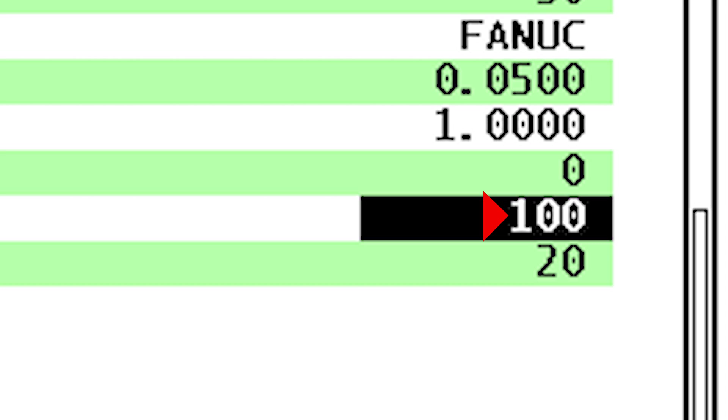Let's start up our spindle at 2000 RPM, and let's turn on SSV. Our settings have SSV adding and subtracting 100 RPM from our speed continuously every 2 seconds. And we can hear the spindle speeding up and slowing down.

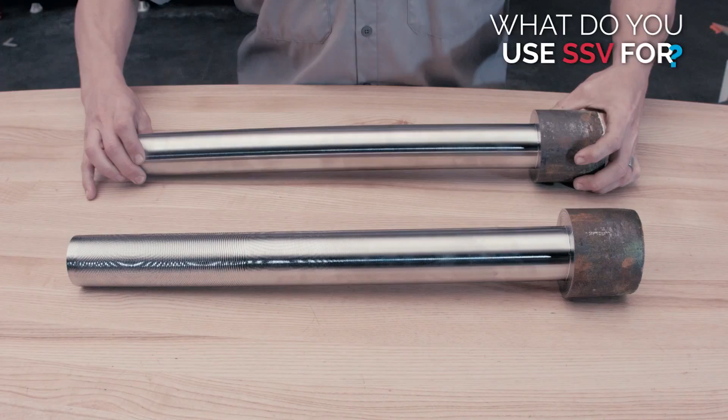Now we'll turn out the lights and turn on a strobe light flashing 2000 times a minute. Now we can see our chuck rotating faster and slower than our 2000 RPM commanded speed. That's cool, but what do you use SSV for? Well, when difficult cutting conditions cause chatter in your workpiece, SSV can help.

We all know chatter is bad, but what is chatter? Describing how chatter starts and progresses during turning can get really complex. In essence, chatter amounts to a resonance that starts between the part and the cutting tool, leading to a vibration. This vibration causes a rough, uneven cut on the part.

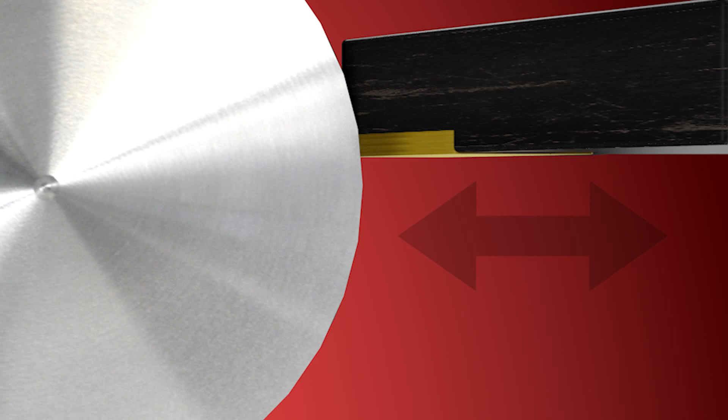This uneven surface causes the vibration to intensify, making the surface rougher still, causing the vibration to increase again and on, until the part is screaming and the finish is terrible. Now the workpiece and the tool are vibrating badly, causing the cut to unload and load back up many times a second, spiking cutting force like an interrupted cut. No wonder it's shrieking.

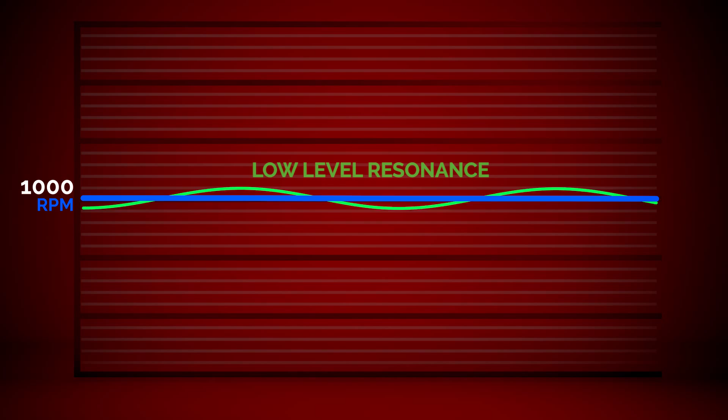If it's resonance that gets all of this started, what if we could stop this resonance from even beginning? That's exactly what SSV is designed to do. Let's look at an illustration of how SSV impacts chatter. Here we have a nice, steady, low-level resonance as our cut is progressing normally.

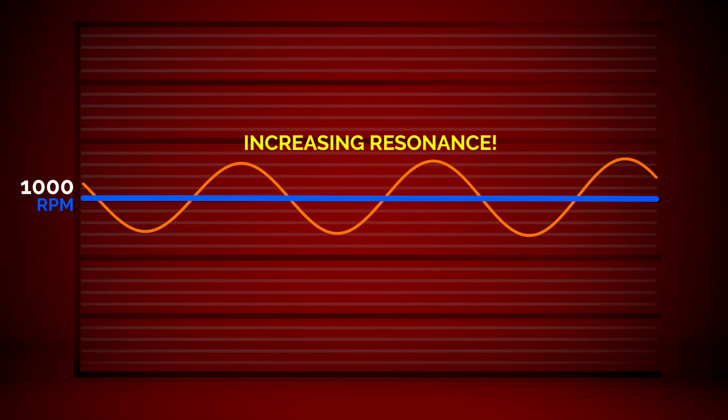When we encounter poor cutting conditions, the resonance begins to change, and we get that escalating vibration that we just described. This vibration will just keep on increasing and increasing. Now we'll turn on SSV. The spindle speed is now going up and down, and that spindle is spending very little time at that resonance speed, keeping it out of the chatter zone. So, the vibration resulting from the resonance has no chance to progress into chatter.

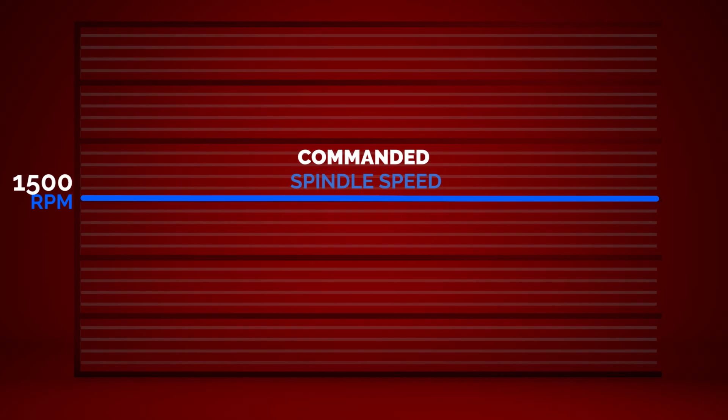So, how do I use this feature? We use setting 165 and setting 166 to drive SSV. In order to understand these settings, let's take a look at this graph. The middle line represents our commanded spindle speed. SSV setting 165 controls spindle speed variation. We're going to insert a value of 150 here.

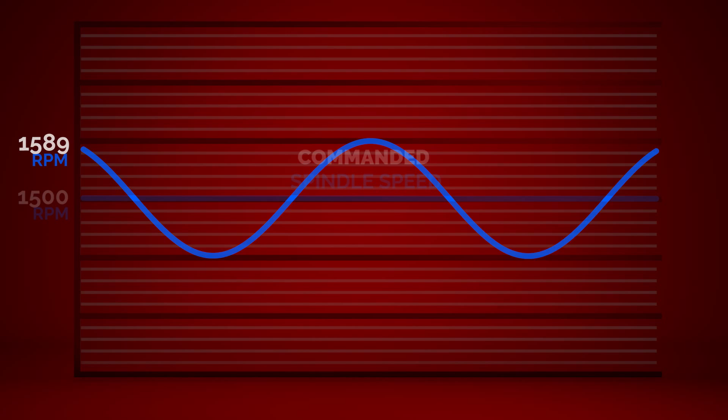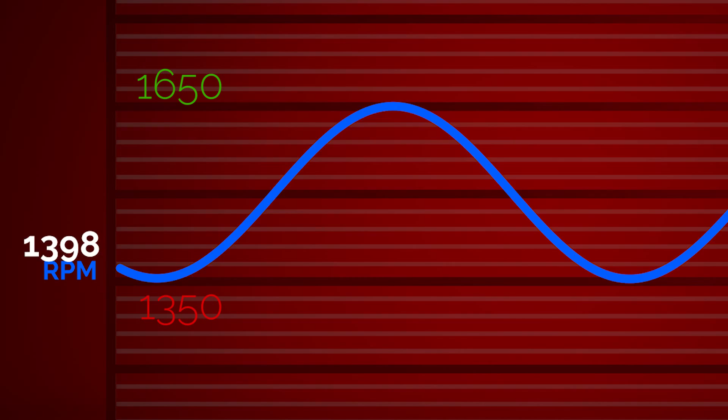What this does is, it causes the spindle speed to increase by 150 RPM and then decrease by 150 RPM. On our graph, that spindle speed swing is represented by this blue line. So our value of 150 yields a high RPM of 1650 and a low RPM of 1350. As you can see, the total RPM range is 300 RPM.

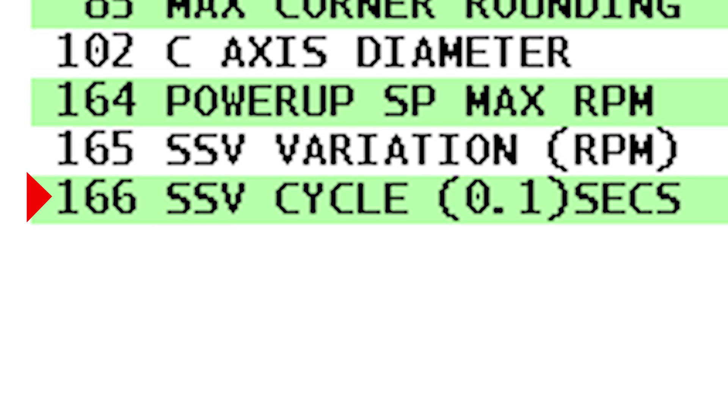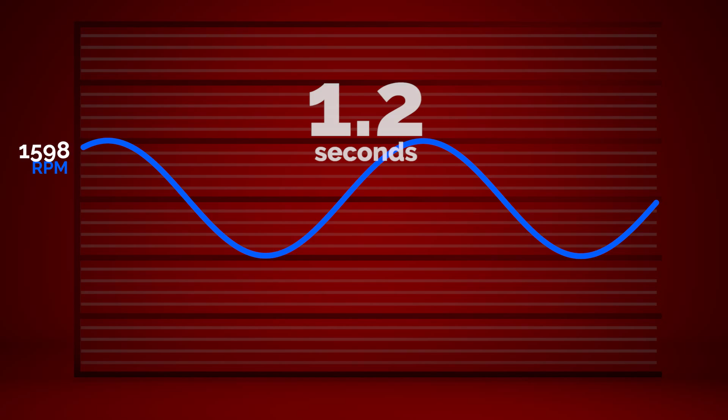SSV setting 166 controls the time period, and on our graph, the distance across the curves represents the time for one cycle. In our example, we'll use a value of 12, where each unit equals 0.1 seconds. The value of 12 gives a time period of 1.2 seconds to complete each of those 300 RPM sweeps.

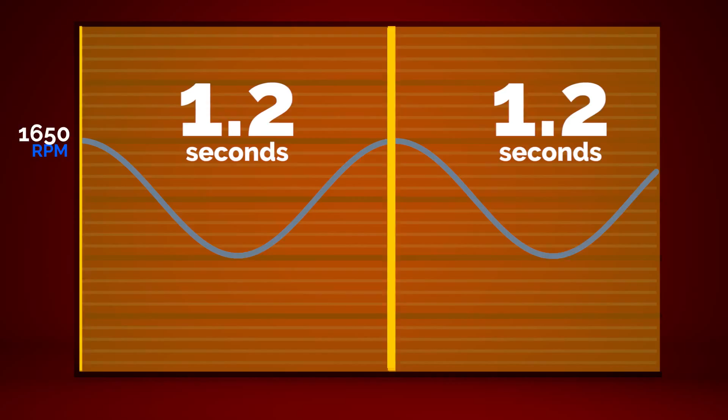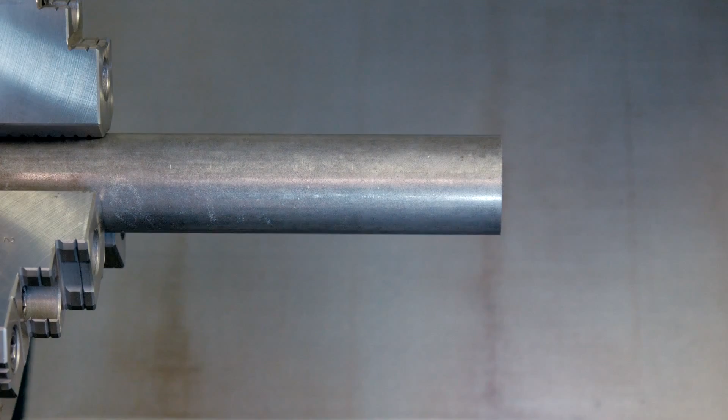Now that we understand the SSV concept a little, let's look at what SSV can do when we're cutting without tailstock support. We're going to turn this 1.75-inch diameter shaft and see where the chatter starts. The shaft is held 7 inches out at an unsupported length to diameter ratio of 4:1. Once we reach a diameter of 1.25 inches, this is where we begin to see chatter.

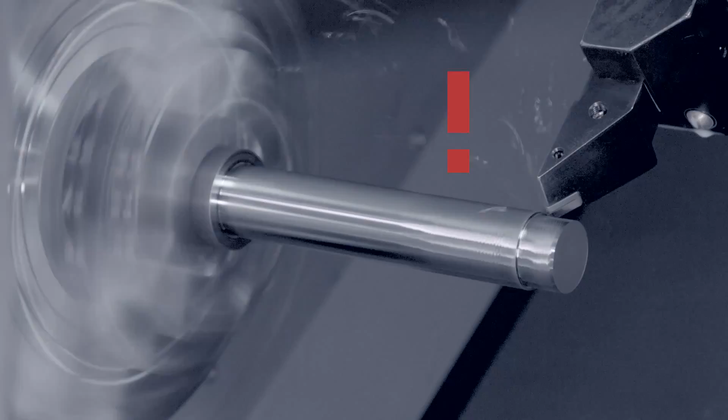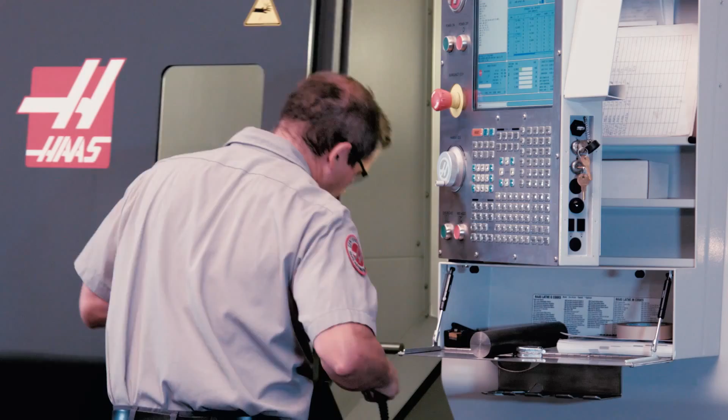On the next pass, at a diameter of 1.15 inches, we're at a 6:1 L/D ratio, which is well past where we normally would need tailstock support. And indeed, we have some serious chatter. Typically, as the L/D increases, chatter also increases. So let's cut a fresh one of these at that same diameter with SSV on. Let's see if it fixes the problem.

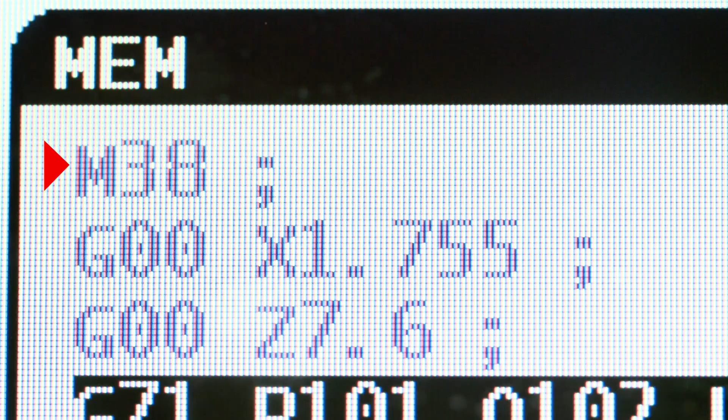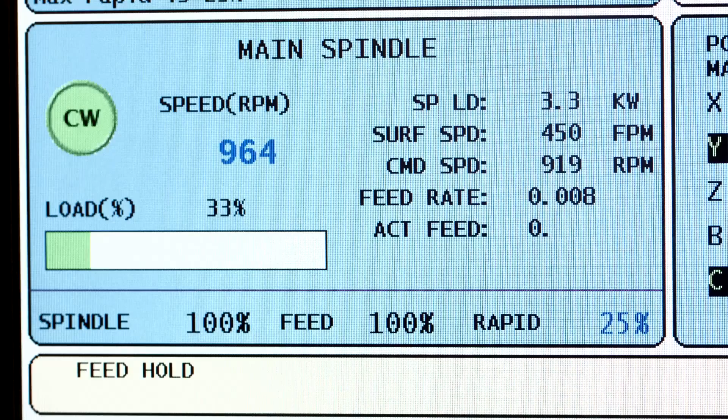We insert the M38 command in our program to turn on SSV. We'll use the SSV values from the earlier example. We had setting 165 set at 150, and we had setting 166 set at 12. Remember, that gives us a 300 RPM swing every 1.2 seconds. We can see that the bar cut using SSV has a much better finish.

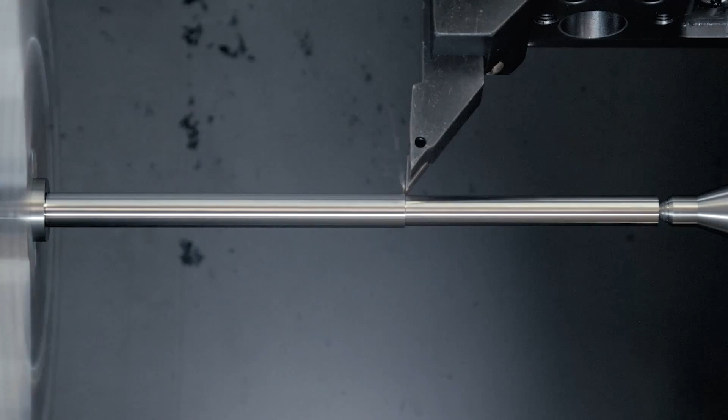If we had to cut this part without a tailstock, which we know we shouldn't, SSV saves our part. Let's move on to demonstrate how SSV can extend your capabilities when cutting with tailstock support. We tried really hard to find a combination of material and an insert that would chatter during a tailstock supported cut. And what we found is the ST30 cuts so well under normal conditions it really didn't want to chatter.

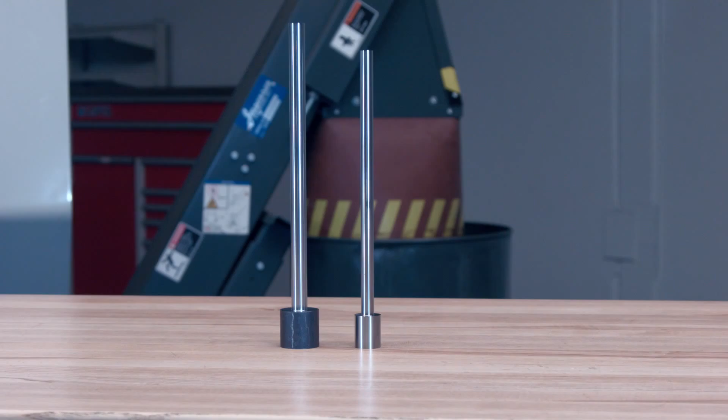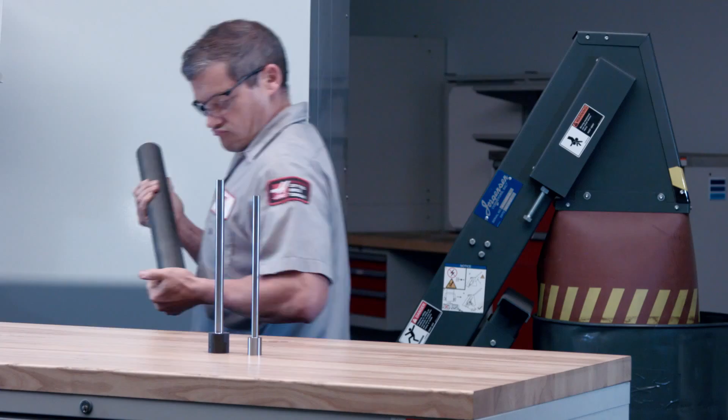After several attempts using smaller workpieces, we ended up down at a 1/2 inch diameter on a 10-inch long workpiece with no chatter and a decent finish. Now that's a 20:1 length to diameter ratio, and in 1040 steel, not the freest cutting material out there. We moved to much larger material, and we made the setup less and less optimal, until we found a combination of tooling and material that finally would chatter.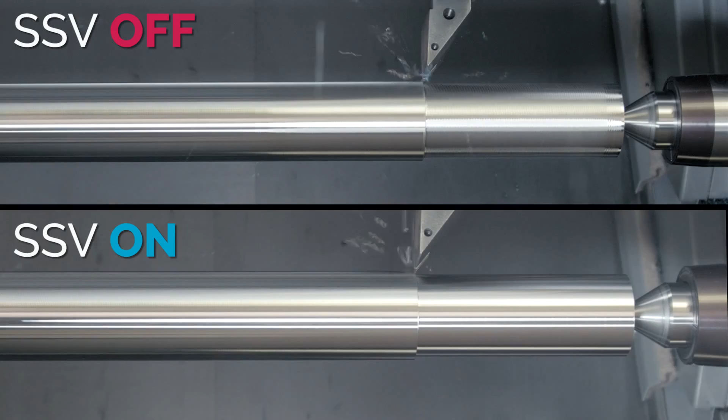And we're not saying you should expect SSV to cure chatter at this absurd level. Yeah, there is still chatter on the SSV part. But looking and listening to the difference between the two shows us that SSV made a really positive change. And if you aren't starting out with horrendous chatter, then SSV can often solve your problem. Okay, let's leave the realm of the ridiculous for a more common set of circumstances.

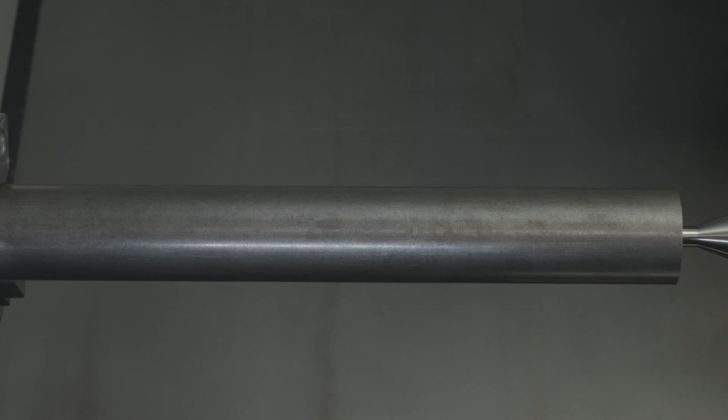This time we're using a 2.25-inch diameter, mild steel shaft, held 16 inches out from the jaws, still with tailstock support, of course. Our tool geometry is less than optimal, with a larger nose radius. Our slow feed rate is spending a lot of time in the cut, and the support is coming from a less rigid live center, all part of our recipe for achieving chatter.

With SSV off, we begin to get chatter at a diameter of 1.12 inches. Just to make sure we've got some decent chatter going, we'll take several more cuts until we're down around an inch diameter. Our test bar is now chattering quite seriously. The L/D ratio of this setup is now 16:1.

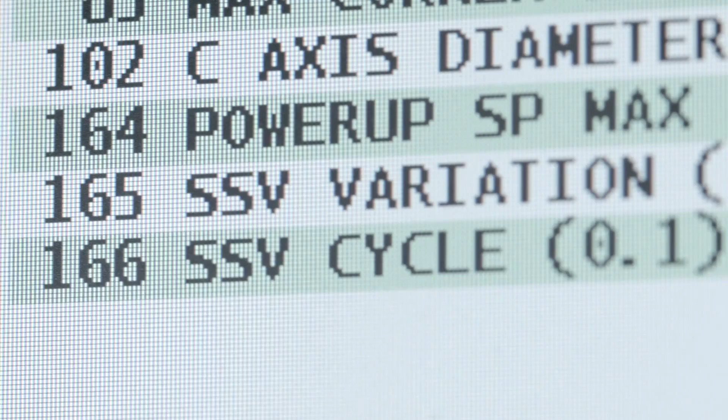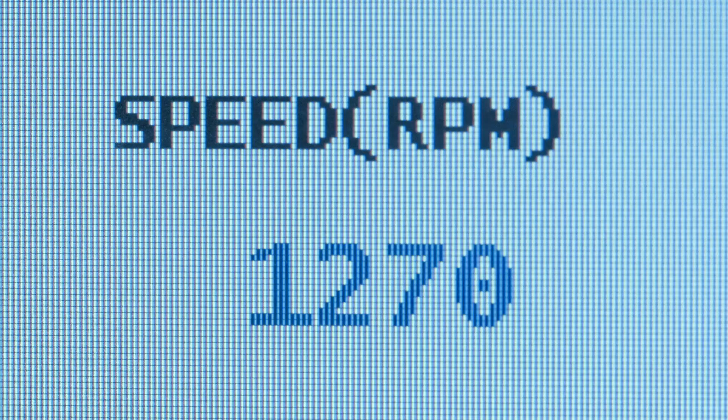Now let's see how this cut does when we turn SSV on, cutting again at a diameter of 1 inch. So our setting 165 is equal to 125, and we have our setting 166 at 6, giving us a 250 RPM swing every 0.6 of a second. And again, we can hear and we can see the chatter has disappeared. The finish on the shaft using SSV is significantly better than the one running at one single speed.

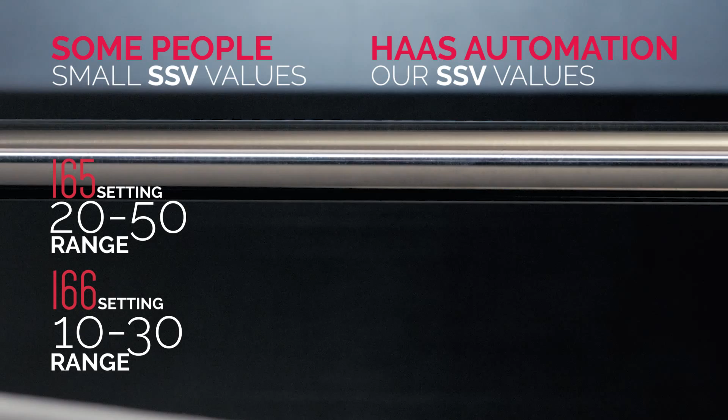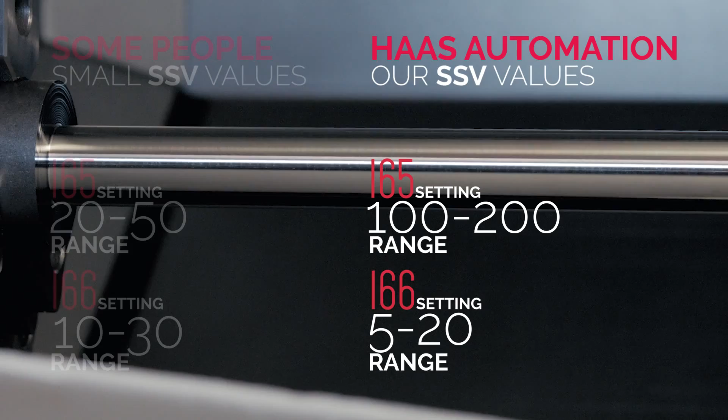Some people like to run with smaller values than we do here, like a 165 value in the 20 to 50 range, combined with setting 166 numbers between 10 and 30. But here at Haas, we found that the best starting point for these two numbers is a setting 165 value between 100 and 200 RPM, combined with a setting 166 period value between 5 and 20. Some experimentation will probably be necessary to find the best values for your particular part.

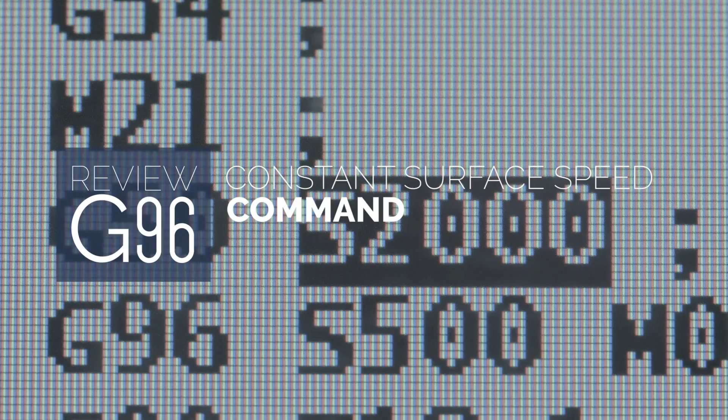Now we're going to take a quick look at G96 and G50, two commonly used G-codes that can interfere with the way SSV functions under certain circumstances. We'll start with G96, which is the constant surface speed command. To get a handle on G96, we need to understand the concept of surface footage. Here we have two bars, one 7 inches in diameter, and the other only 1 inch in diameter.

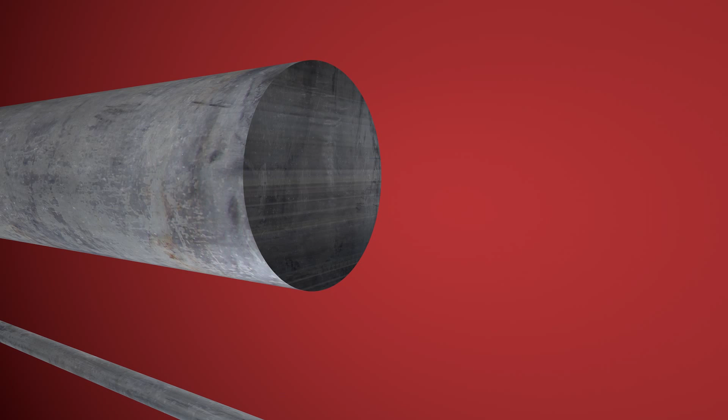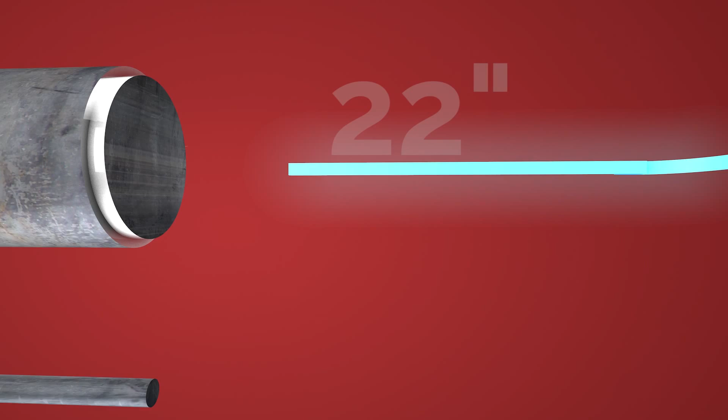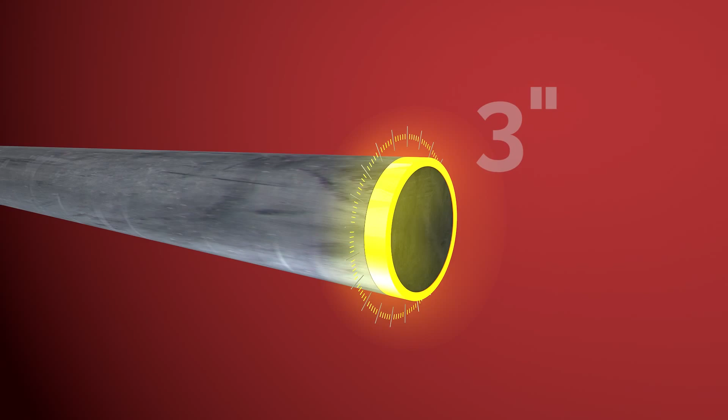Looking at the 7-inch bar, let's see how much distance we can cover cutting for 1 revolution. In 1 revolution, we cover a distance 22 inches long. So 1 revolution equals 22 inches. Now looking at the 1-inch diameter bar, 1 revolution is cutting only about 3 inches. The 7-inch part is covering 7 times more distance per revolution than the 1-inch part. That means the 1-inch bar needs to rotate 7 times faster to cover the same distance.

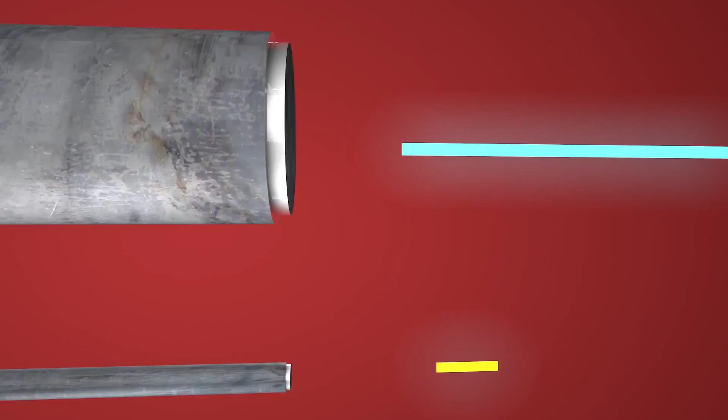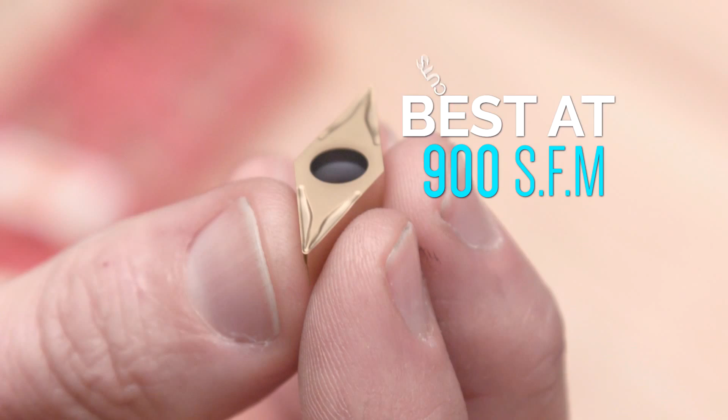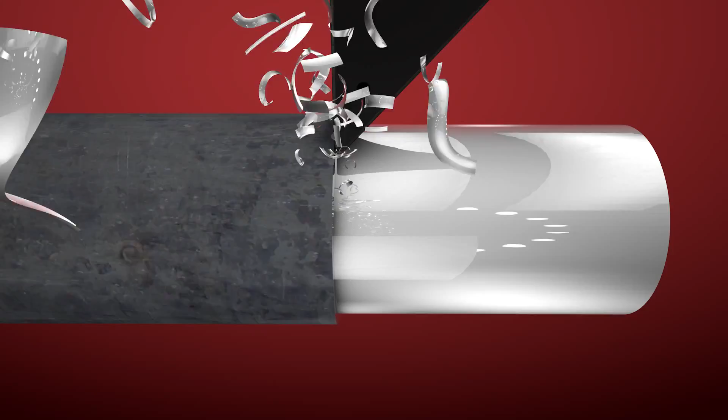Now let's say we want to use this insert, and it cuts best at a surface footage rate of 900 SFM, or surface feet per minute. That's 900 feet of material rotating past the cutter every minute. To get 900 surface feet per minute on our 7-inch part, we need to cut at 490 RPM.

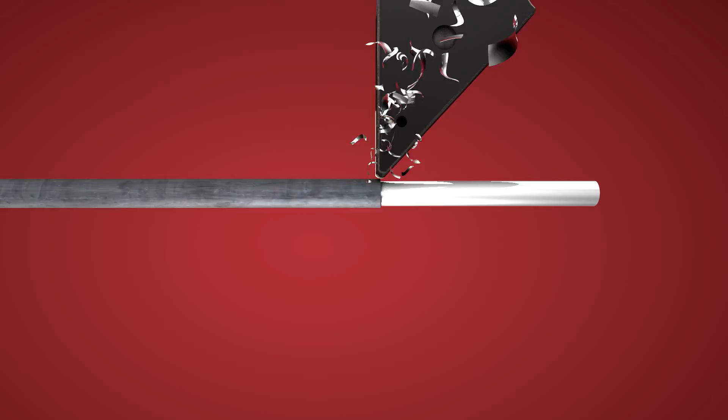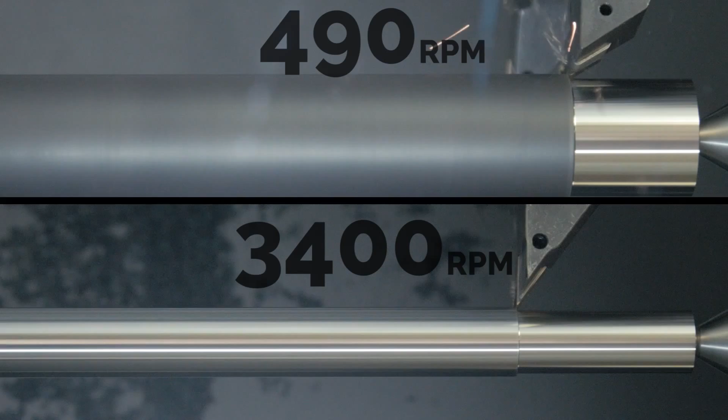But to get 900 surface feet per minute down at a 1-inch diameter, we have to crank that speed up to about 3,400 RPM. Yep, 7 times faster. So when our part got 7 times smaller, our speed had to get 7 times faster. Now we know that speed must increase as diameter decreases, and vice versa, to keep surface footage the same.

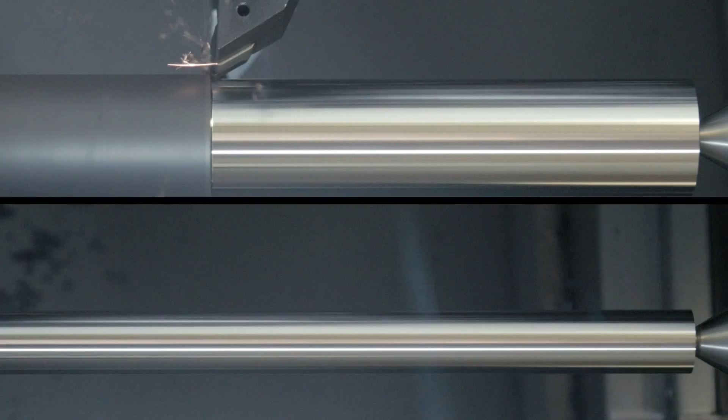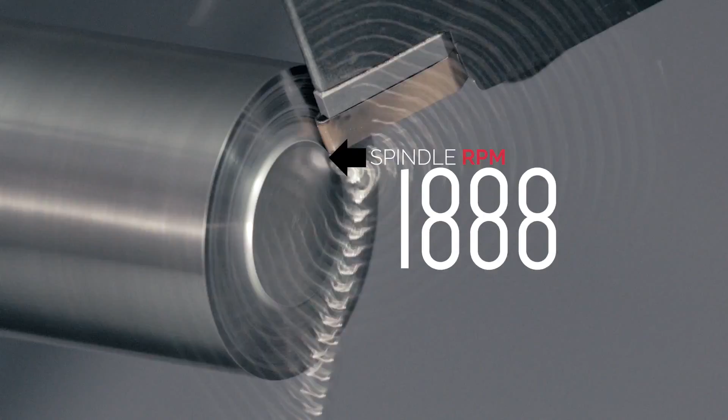And that's exactly what G96 does. It adjusts spindle speed on the fly to maintain a constant surface speed at the tip of the tool. When you're facing a part, for example, spindle speed increases constantly as the cut moves towards the center. So it's easy to see how spindle speeds can get away from you pretty quickly.

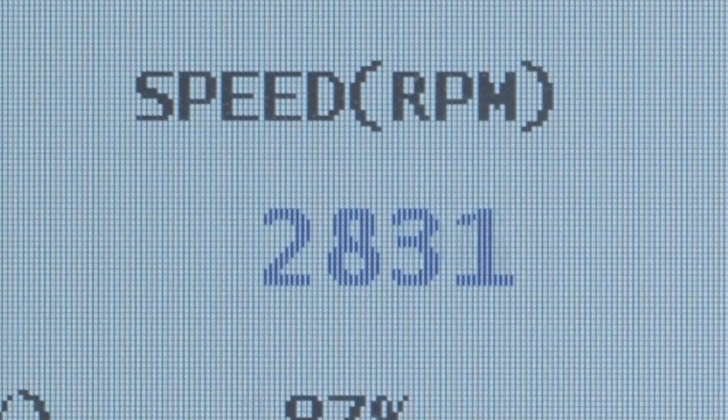So it would be good to have control over the high speeds that G96 can generate, and that's where G50 comes in. When used in conjunction with G96, G50 sets the fastest allowable speed within a programmed operation. The spindle can't go any faster under any circumstances. G50 provides a failsafe, and it's wise to include it in your programs.

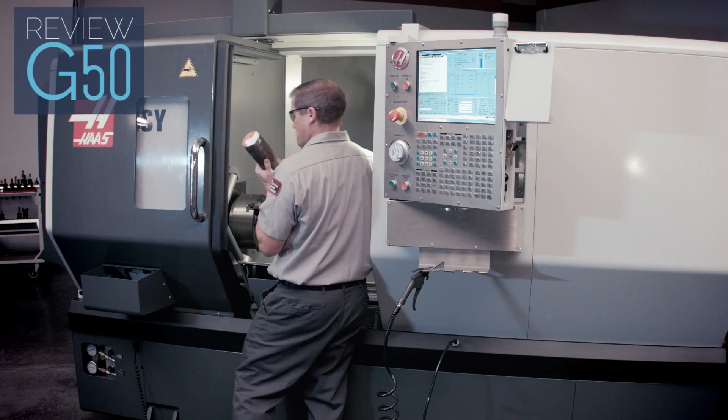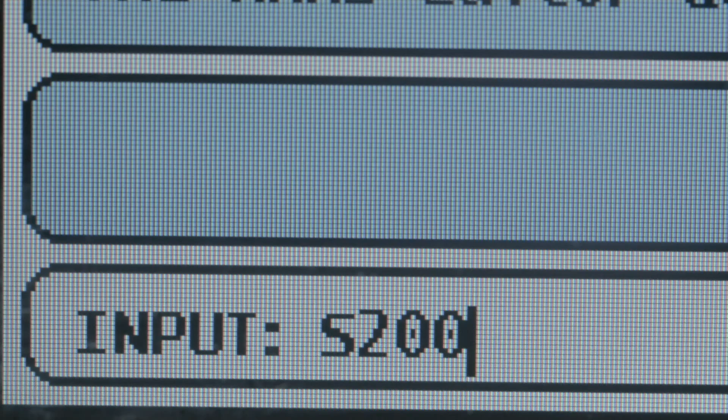Say we're turning a heavier part, and we're concerned about high RPM reducing chuck grip force and potentially throwing the part. And we're not comfortable going any faster than 2000 RPM with this setup. So all we would do is set our G50 to 2000 RPM. Now the spindle can't go above 2000. G50 is often used in this way to keep G96 commanded spindle speeds in check.

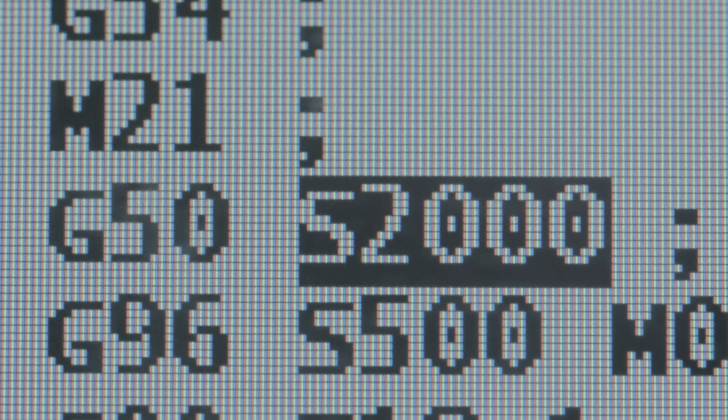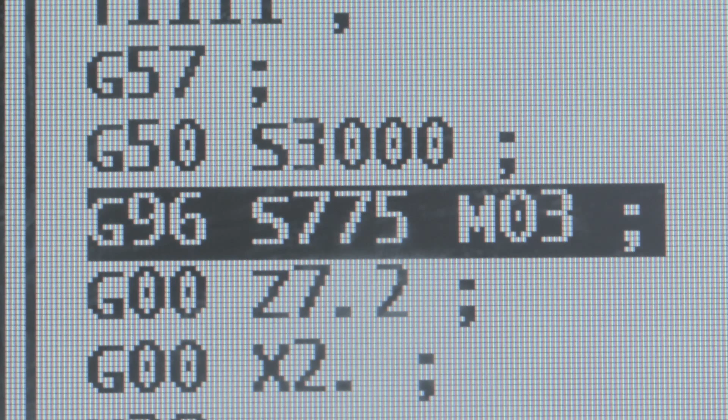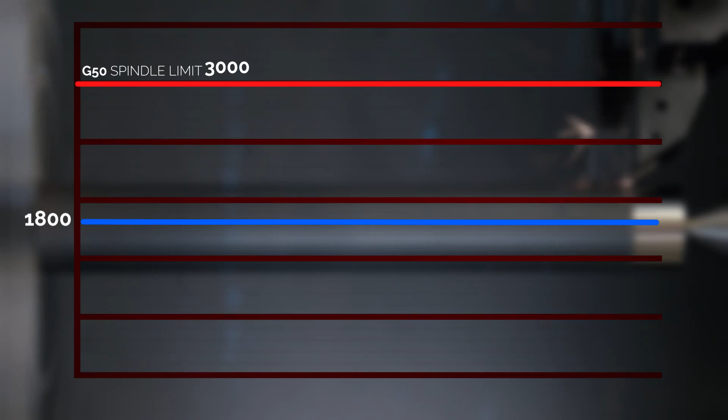Okay, let's recap, and we'll see how G96 and G50 can interfere with SSV. For this new example, we'll use this 1 3/4 inch bar. Now we know that G96 adjusts spindle speed to maintain constant surface speed. Our program has a G96 set to 775 this time, which is telling the spindle to maintain that 775 surface feet per minute. Our program here has G50 set to 3000 RPM again. SSV is on, and our setting 165 value is 200.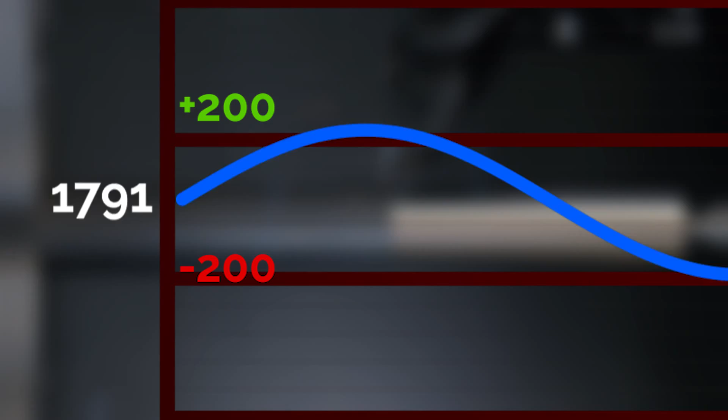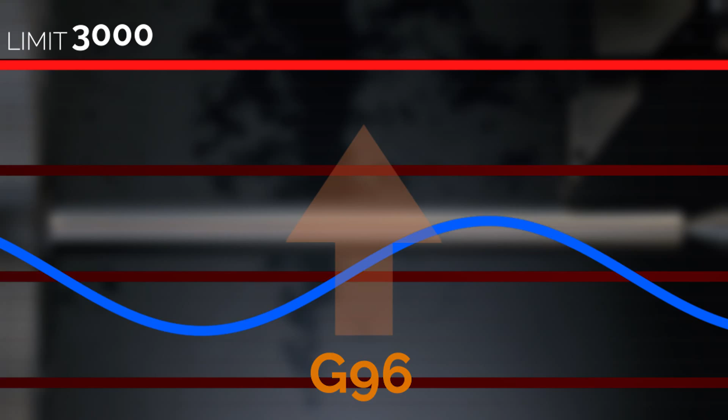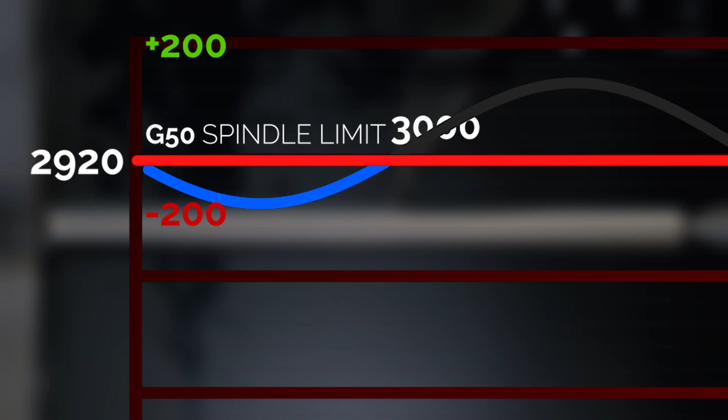With 200 added to the commanded spindle speed, our RPM for the first cut peaks at 2000 RPM. As we continue to cut and that diameter gets smaller, of course the spindle speed increases. The final pass is at just under 1 inch in diameter. Now, G96 is attempting to push the spindle to 3150 RPM. Remember, the spindle speed is being limited to 3000 RPM by the G50 command. So we have a problem.

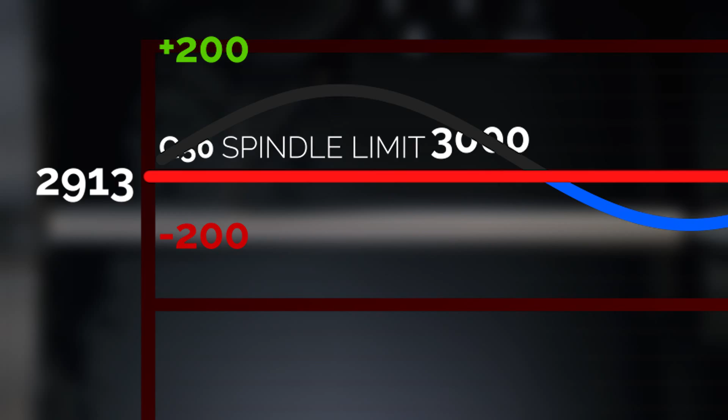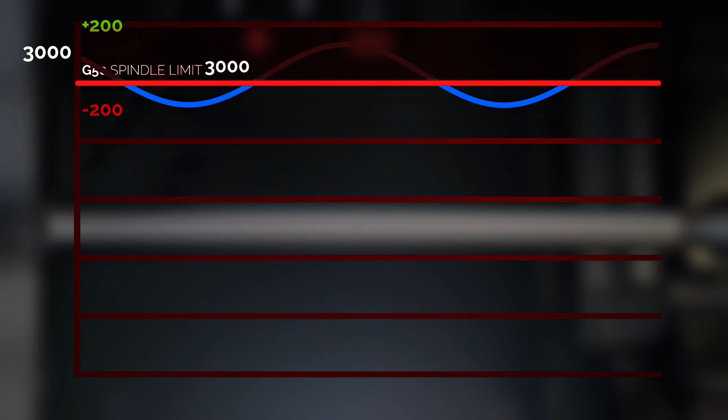The black line rising above the 3000 RPM ceiling represents the part of the SSV range that's being clipped. The blue line below this represents the only portion of the SSV range that's doing anything. So how do we solve this problem? There are only 3 variables that we can change here.

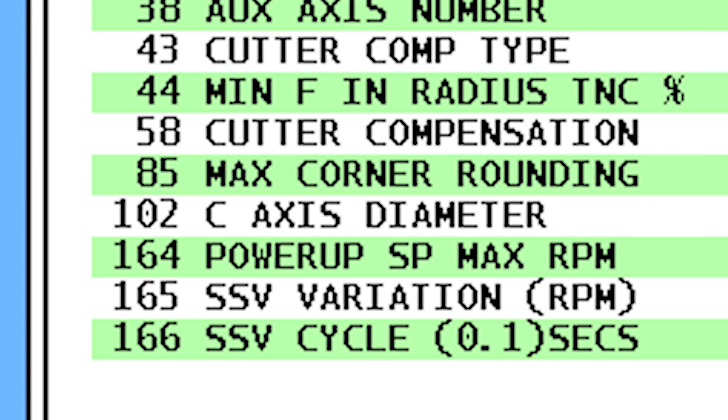We don't want to increase the G50 setting because we're afraid of throwing the part. And we know our SSV settings are allowing for a good finish, so we don't want to touch those. That leaves us with G96 as the logical value to change. In this scenario, we'll reduce the G96 setting from 775 down to 700, which still allows the insert to cut decently.

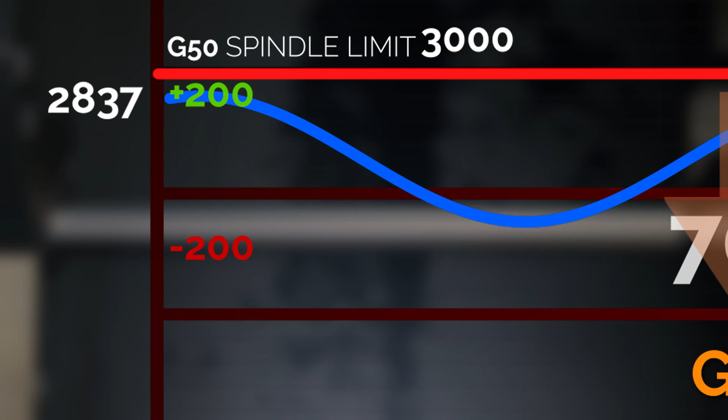On our chart, you can see the G96 range drops down, and now our peak RPM with SSV is 2900 RPM. We're below our G50 limit, and SSV is working again through its entire range.

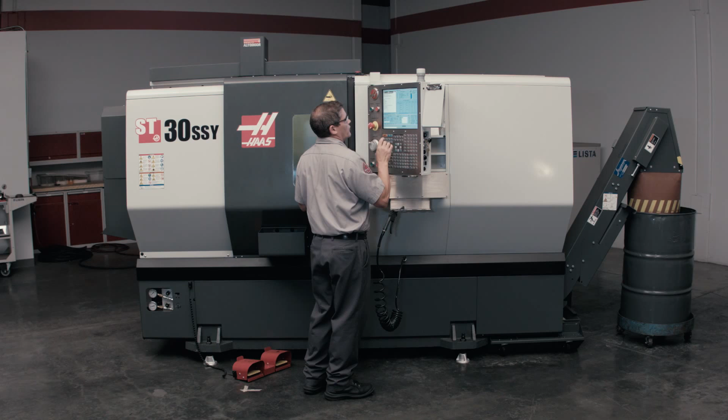How can I tell if G96 and G50 are causing SSV not to function or to clip? Easy. You won't see the spindle RPM change that much on the screen. And you also wouldn't hear the spindle changing speed continuously. Remember, if you can't hear it working, it probably isn't working. Here's an example of what it sounds like when SSV is fully functioning.

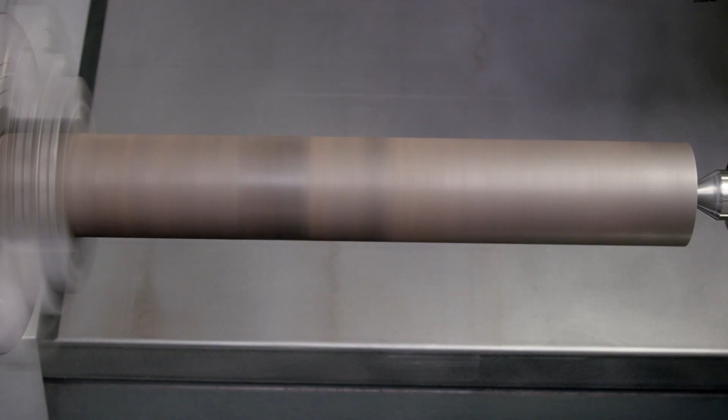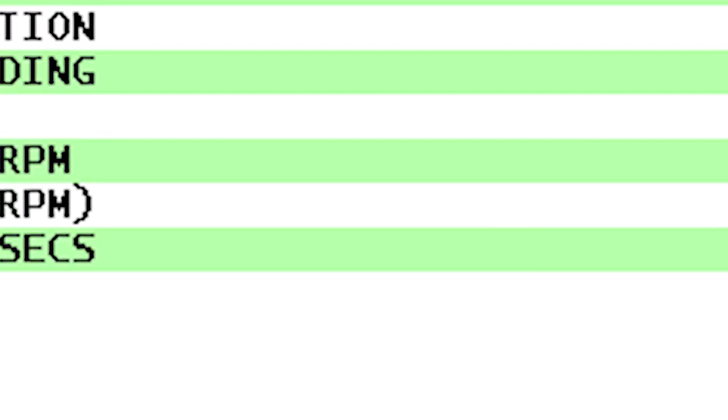One more tip before we wrap up. You should pay close attention to how SSV settings affect spindle load. Extreme RPM swings and short time period values can push the spindle well into the overload region. Starting with SSV values of 50 and 20, we see the spindle isn't really working very hard.

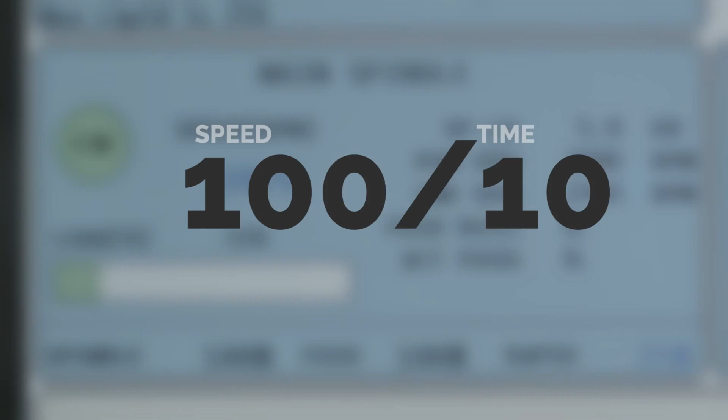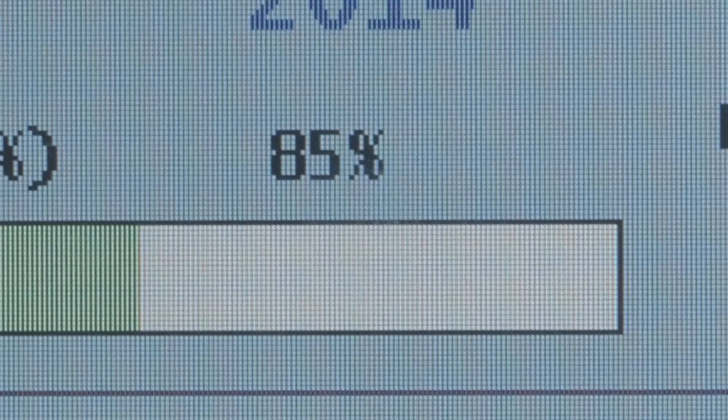Change those values to 100 and 10, twice the speed in half the time, and now the spindle load is at a moderate level. Increasing those values to 200 and 5, doubling and halving our values again, now the spindle is really working. In this region, SSV should only be run for very short periods.

There will be situations where L/D ratio, materials, and cutting parameters reach such an extreme that even SSV will not be able to remedy the chatter. But there are also times it can be the difference between completing a job or not. SSV is a valuable tool for achieving the best finish on a difficult material or setup.